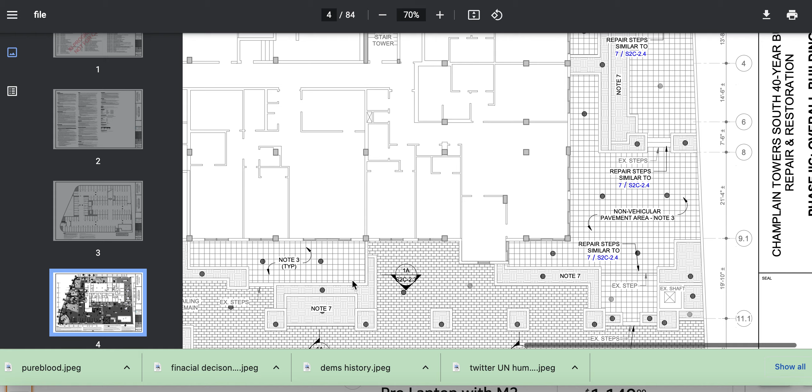9 is the face of the structure right here, 9-1, so that's your face. We'll go right here at 9. As we follow over, we see, okay, this is K, L, and M. Let's verify that by the top. K, L, M. And we'll stay on 9, or 9-1 right here. See it? It's 9 also. 9-1 is the little shift.

9-1 and 10, it means they shift it, and you can find them if you jog to the left. You should be able to find it over here. Like here's 10-1, there's 11, here's 9 up here actually. So they're calling 9 something up there somewhere. All right, we'll just consider this 9-1, the plane of the building right here. 9 is probably just a one-off. Let's see, where's 9? Probably just something.

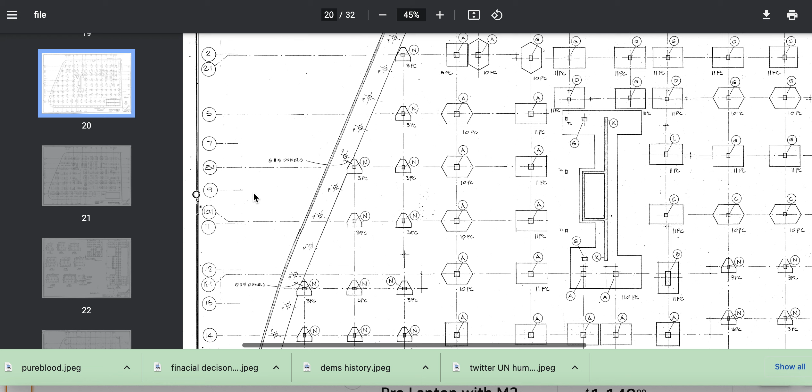Maybe it's on top of the H-beam. Anyway, we're going to call it 9-1 right here, the face of the building, and I'll intermix that with 9. Just to be clear, it's this line right here. So here's K, L, M, right? K, L, and M. They're all called C's, the face of the building. All right, this is a 10-piece, a 10-piece, and a 9-piece. Huh, what's a 9, 10, 9 piece?

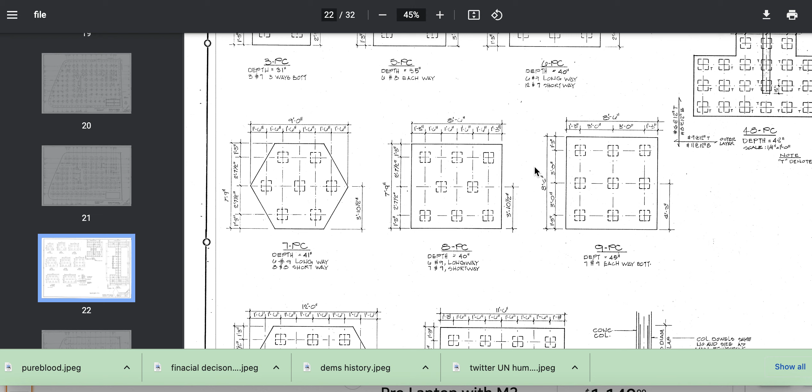What does that mean? So we come to this, and the columns rest on top of these piles into the ground. And these piles, here's a 9-piece, 3, 6, 9. As you can see them here, there's a spacing, and the pile would go, the column would go on top of this. Sorry guys, these are piles. The column goes on top. I often screw that up when I'm talking to you.

I apologize, not trolling, my brain just wants to go too fast sometimes. All right, this is a 10-piece. 3 at the top, 3 at the bottom, 4 down the middle. Your column would go here. These are piles driven in the ground. In this case, I think they were poured.

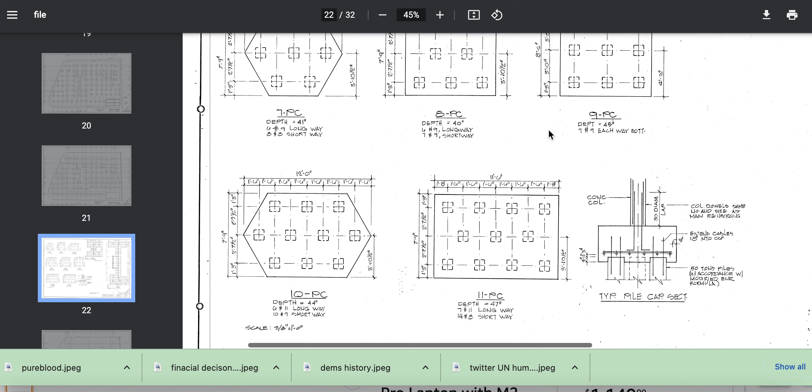So there's a 10 and there's a 9. So we're just going to pick on something that would buckle or fail. Well, we would pick on the 9-piece here. This is K, L, and M. Let's see if I'm on the same line again.

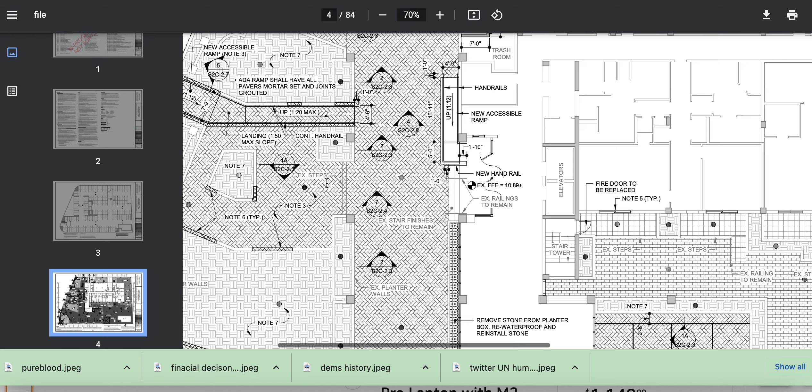Come on — oh, they don't show it on this one. So much for that burn. A little bit of a burn there. Maybe they show it on this side. All right, so there's your 9 — remember I said there's a 9 there? This is your 9. It's sitting on top of the H-beam.

Recall this was enlarged also, from 4 foot to 5 foot. This was the kitchen bump out. They also did bump outs, closed up porches above — longer story, but I want to keep this a little short. So I'm just giving you Columbo hints now. You've got enough of it.

Here is the wooden wall, and here is a wooden wall. False, false statement, false statement — timeout, these are block walls. So these block walls are supported, or go between each column here. So: block wall, and this is also, I believe, a block wall. I saw no wood timbers like that — they didn't make wooden walls there. Maybe they used 6-inch block, or maybe they did not.

Sorry, that's some vitamin D stuff and something else. There we go, so we're back to this one. So here is roughly that other column right here, and then the other column in the bedroom is here. You can search and find the bedrooms — you will find the other column there. And then the other column's behind it.

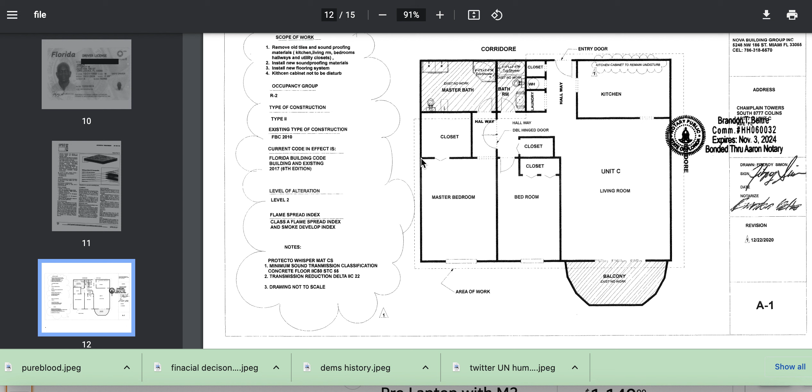And so as you overlay, you see that the column is like this. So there's the bedroom, column, and column. So this wall is supported, as I talked to you guys about. The critical shear zones are here. Tributary zones would be between two critical shear zones. So it's got some support, a block wall supporting between these two, picking up pretty good.

And across the face here, the facade, it's got some glass windows, etc. All right, same deal, it's picking up. Same thing here, and then block wall again across from here to here, from column to column. But from this column to this column, we don't have the wall inside there. In fact, we have it offset — the wall's over here now.

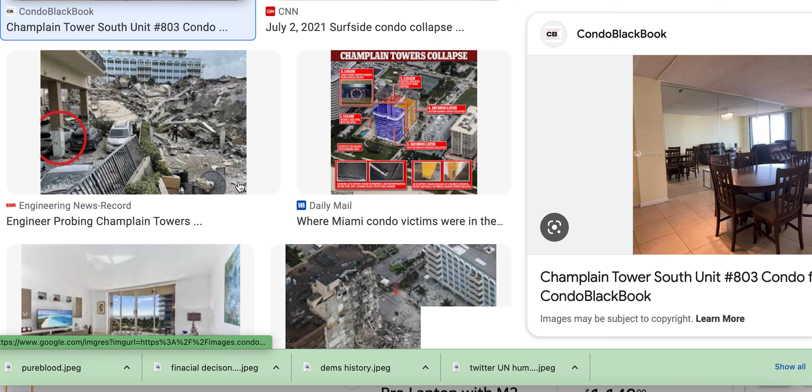And it has this block wall system T-boned off of it, if you will. It's T-boned off the block wall. Let's see if we can get a better exterior view of that. I thought it would be more handy than that. Sorry, apologize.

So, more T-boned off of that. Sorry about dropping the ball on this one, guys — I thought I had it queued up. Kind of weird, I had it queued up.

All right, let's just use that one. So here's that wall, and it's T-boned off, and then there's like a T, and then there's this glass door, and then above it is a floor. So part of that floor is being supported by this column here by default when they support it. It's like a bracing — it was not the intent to do that, but once you support it under there, you support it under there. It's fully supported.

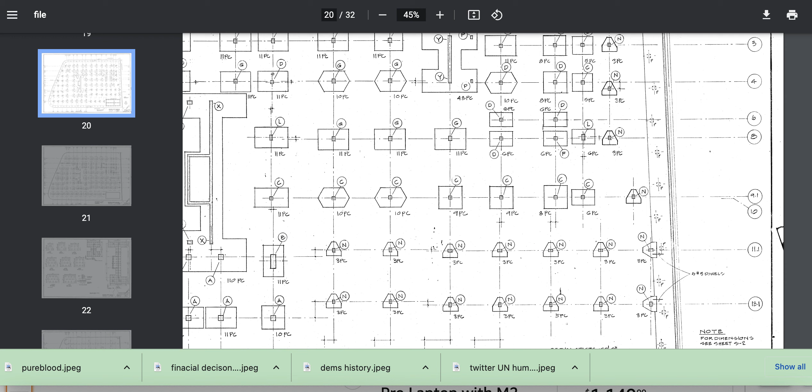They grouted up to the top. Now if they left it short up there, say coming up half an inch short, anything but touching, it wouldn't be a support — it would just be a false wall with some ability to float, if you will. But that's not to be. It's each wall system acting like a support system, a brace.

So then we have this wall system here supporting from the floor above. Oh, wait a minute, over here too, floor above. Think of them as scaffolding from the first floor all the way up to where it stops, probably the roof line — wherever this continues, this layout. So these walls act as a support system. This wall is here with a little bit of break between it, and no column offset — the columns are in line here. So this wall has a serious loading in the front.

Remember, the front goes down first, and it comes towards us. So where we start looking for instability and rigidity, we start thinking about loads.

We've got a floor system, but we also have a floor system that has a scaffolding, if you will, a block wall system going up from the first floor. When I say the first floor, I mean apartment 111, up to wherever it stops. I don't know, 11th floor. I don't know if it stops at the roof line or not, because they might have jogged the layout a little bit.

And so when this deck goes down, it releases. This is no longer confining it. And remember, this T-bone thing is acting kind of weird, like a loading structure also. And part of that, I think, is the structure was not supported all the way down. But this load is continuous. And it's continuous theoretically, it's supported. Each floor is supposed to be supporting its own load, including the block wall system.